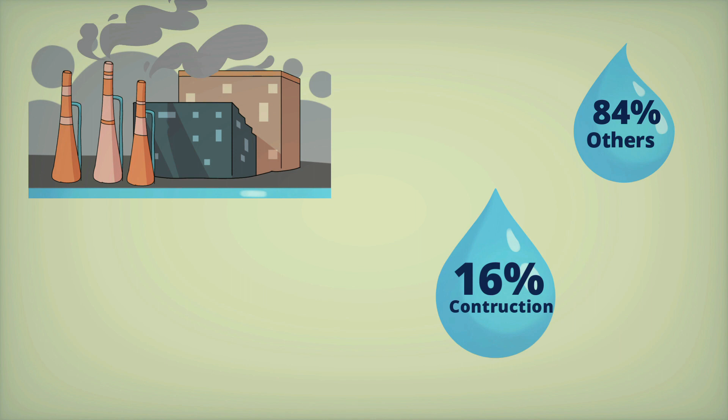Globally, the domestic use of fresh water represents only 8% of consumption, compared with the 70% that accounts for agriculture and 22% that corresponds to industries. The construction industry is responsible for 16% of world water consumption, while 9%, which corresponds to the industrial sector, is used for concrete production. Concrete is everywhere, and its demand continues increasing rapidly.

It is estimated that concrete production will intensify up to 80% and 90% in countries like India and Brazil by 2050. Consequently, if current practices of preparation continue, more and more freshwater supplies, which are critical for the survival of human civilization, will be depleted. So, what can be done about it? Would it be possible to use seawater in the concrete industry?

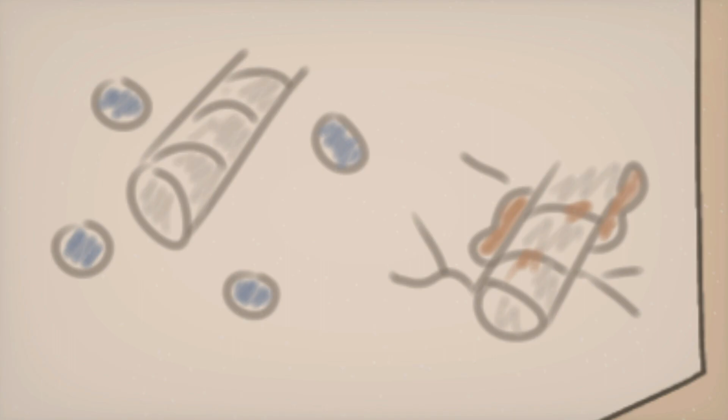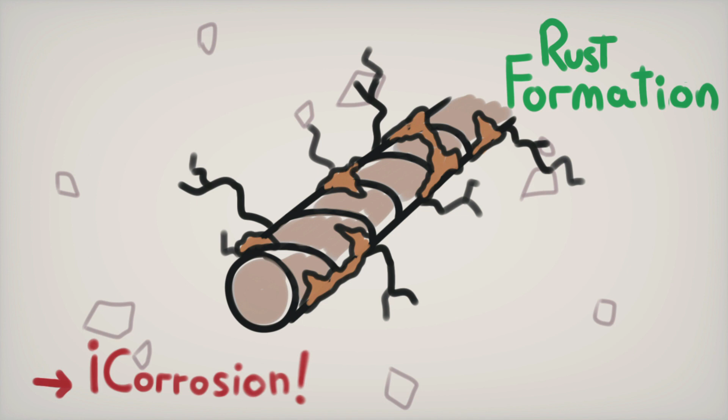Seawater mixed concrete could reduce the use of fresh water. However, seawater has an average salinity of 3.5%, from which 78% is sodium chloride, causing the corrosion of steel rebars. Therefore, its usage is currently prohibited by construction committees. Are there any other alternatives to reinforced concrete? For sure! The importance of corrosion justifies continuous searching for new technologies that could be used in the concrete industry.

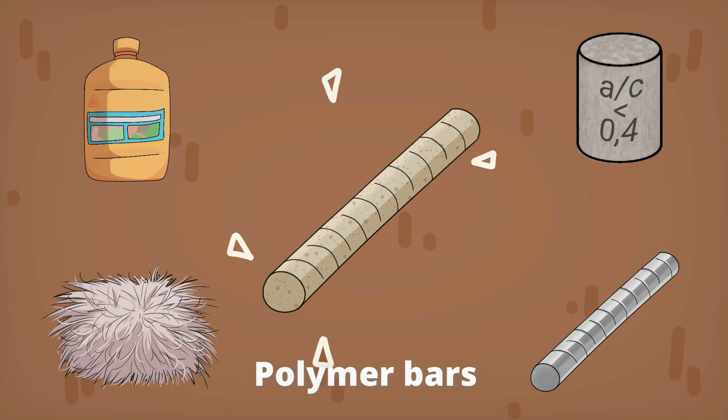For that reason, glass fiber reinforced polymer bars become a great option, since they don't rust and are an excellent alternative for buildings with strong mechanisms against corrosive agents. Glass fiber reinforced polymer bars do not react to salts, chemical products, or the alkalis present in the concrete. Fiberglass rebar is a stronger and lighter alternative to conventional steel rebar.

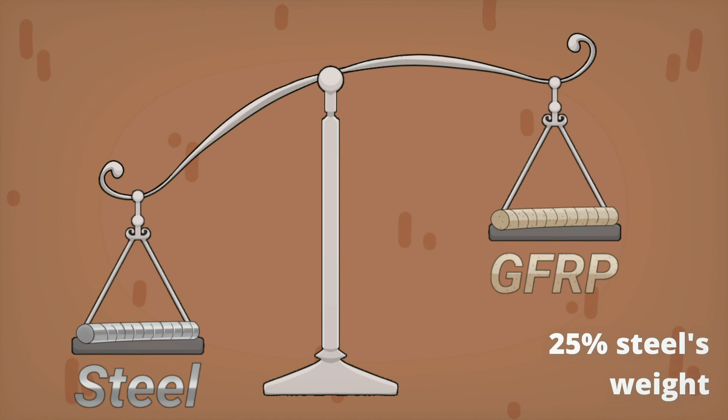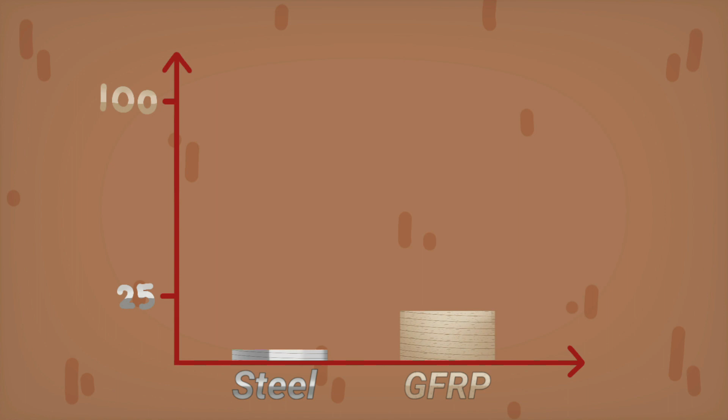It is a quarter the weight of steel, superior in tensile strength, non-magnetic, and non-conductive rebar that has a life cycle of more than 100 years. Although corrosion-resistant reinforcement has a relatively higher initial cost, fiber reinforced polymer in conventional concrete structures reduces maintenance.

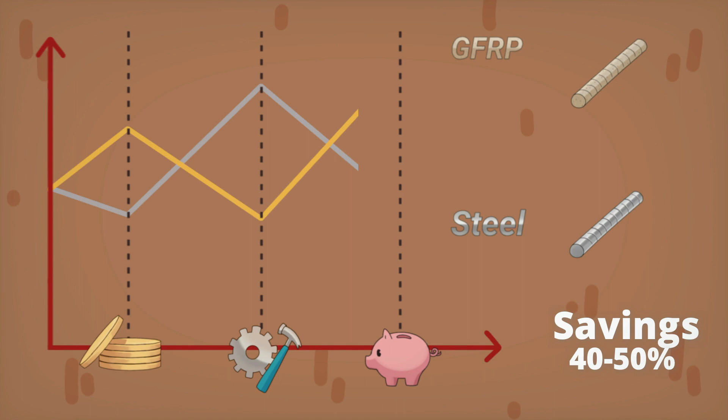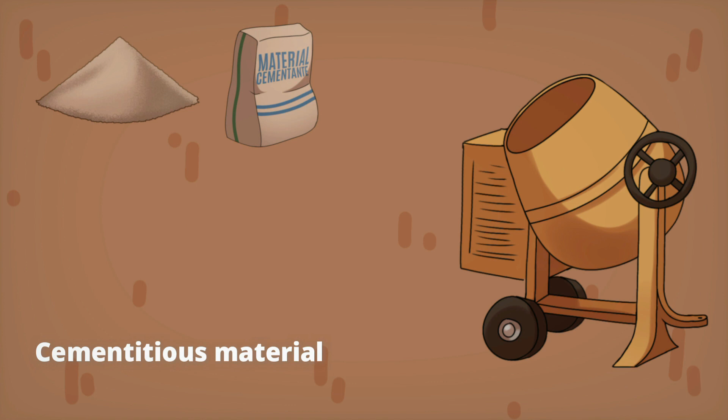On the sustainability aspect, mixing concrete with seawater will lead to a reduction of up to 12% in its water footprint. This is due to an innovative mix design that incorporates fine aggregates, cement, SCM, admixtures, seawater instead of freshwater, and glass fiber rebars as reinforcement for concrete.

Consequently, our proposal is to conduct tests to investigate and assess the incorporation of seawater in replacement of freshwater for the elaboration of reinforced concrete with glass fiber reinforced polymer rebars, which is going to contribute to the use of sustainable concrete in reinforced concrete structures.

We've considered that a research proposal will need the approval of committees ACI 201 about concrete durability and Committee ACI 211 about proportioning concrete mixtures, which could be the best candidates to fit in this proposal. We must take into account the following considerations.

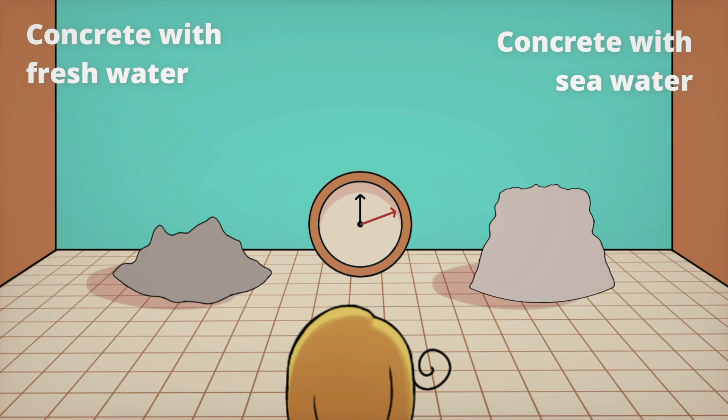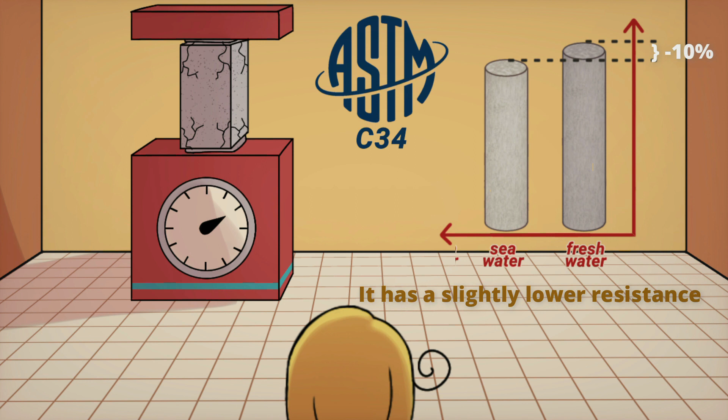The workability and setting time of concrete are reduced by the effect of seawater, for which the addition of admixtures in accordance with the ASTM C494 standard should be considered. The compressive strength of concrete mixed with seawater is slightly lower, 10%, compared to conventional freshwater concrete. So, complementary alternatives should be investigated to avoid this effect.

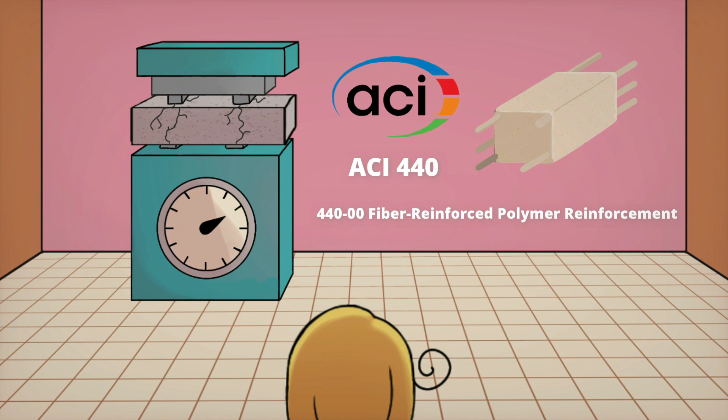With respect to the design and construction of structural concrete reinforced with fiberglass reinforced polymer bars, all the considerations established by the ACI 440 Committee on Fiber Reinforced Polymer Reinforcement must be taken into account. Fiberglass rebar is ideal for infrastructure projects such as water treatment plants and retaining walls.

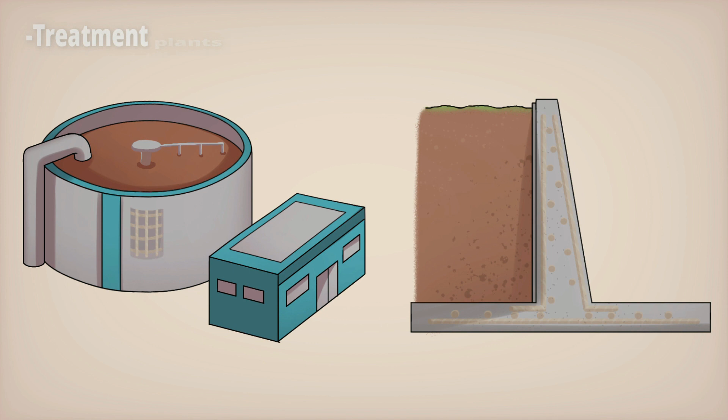Over time, and often due to the conditions in which they operate, many industries experience problems with the degradation of their reinforced concrete infrastructure. Runways, airports. Runways must be built with a long-term vision. These runways must be built with fiberglass reinforcing material so that they can withstand the impact of more than 500,000 pounds on the main runways.

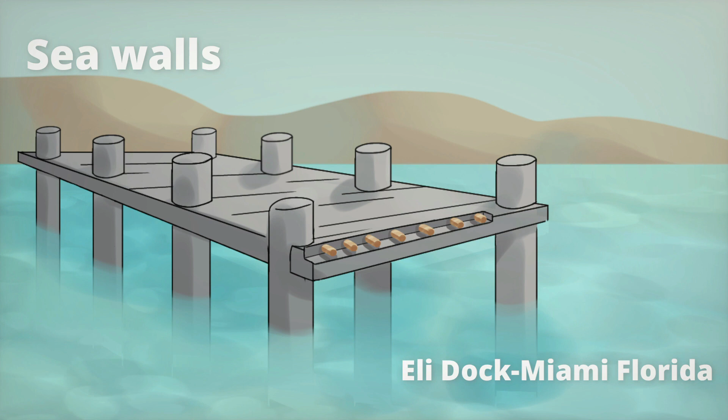Seawalls. Marine structures such as dikes, breakwaters, artificial reefs, and floating sea docks provide protection against flooding and erosion, as is the case of the Eli Dock located in Miami, Florida. Precast. By using fiberglass rebar in precast products, it will extend the service life of precast concrete to 100 years or more.

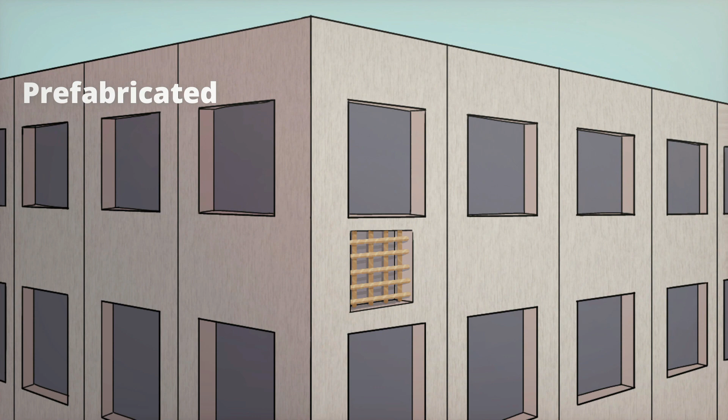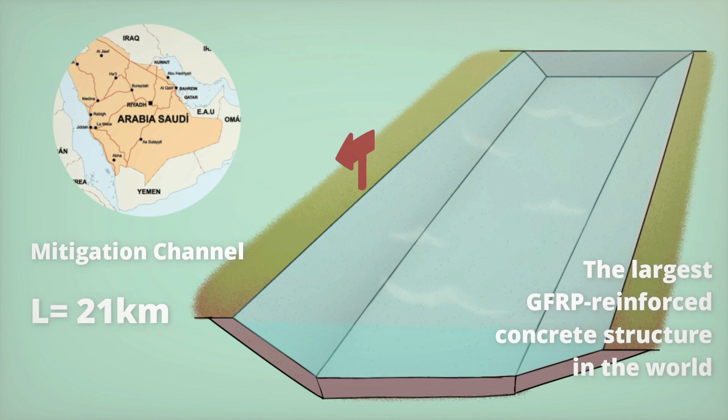Mitigation channel. In Saudi Arabia, the construction of the largest reinforced concrete structure with fiberglass reinforced polymer bars was recently completed. The 21-kilometer-long liner is the largest GFRP-reinforced concrete structure in the world. Glass fiber reinforced rebar is an ecological product that helps to reach certain LEED credits in both Canada and the United States. It's the most effective solution to build sustainable concrete structures.

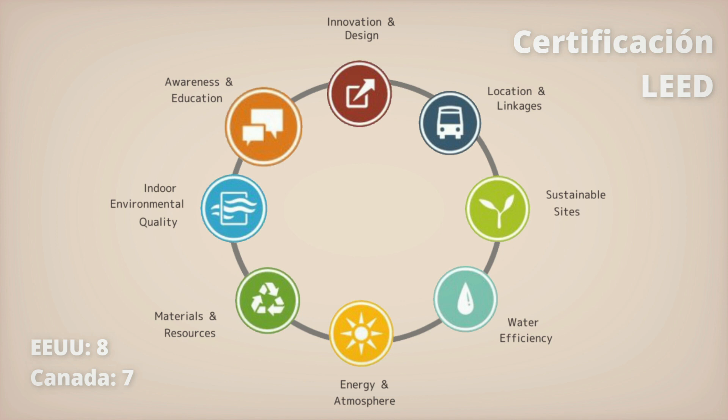This is how the use of seawater with fiberglass reinforced polymer rebars stands as a great alternative, bringing with it the efficient use of water resources through responsible production and consumption to ensure sustainability and water supply, promoting sustainable cities and communities. A valid possibility for freshwater preservation in the concrete industry is represented by the use of seawater.

The current objectives being worked on include the projection of a new generation of specifications for construction and design that will permit inclusion by the American National Standards Institute. The relation between sustainable concrete and GFRP reinforcement would amplify the availability and sustainability of built elements in aggressive environmental conditions without altering their service life and durability.